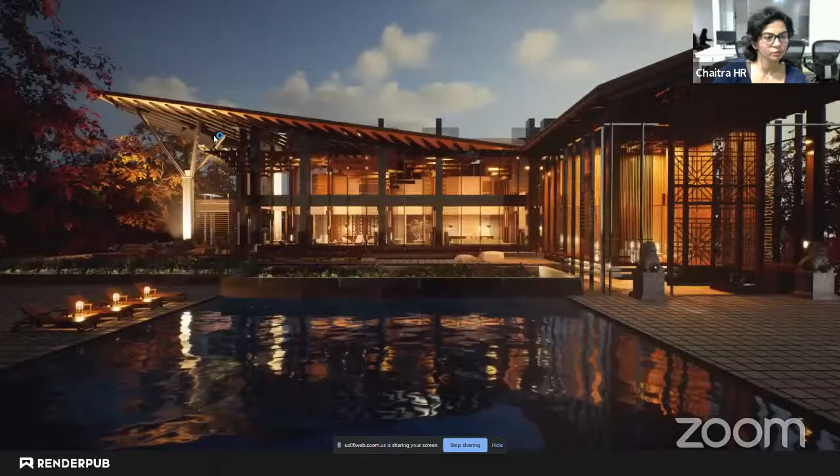This is one of the renders. It's loading, so this is a beta version. If it's a little rough around the edges, we seek forgiveness from you all. You all have to help us better the product. So active participation is highly encouraged, and we'll be very grateful for any inputs that you give us. Criticism also will help us grow. So let's just wait for it to start.

Okay, there we go. I'm going to start with a default scene. So there's a few templates here which you can start with and get a feel for the projects. So, oh okay, that was scary.

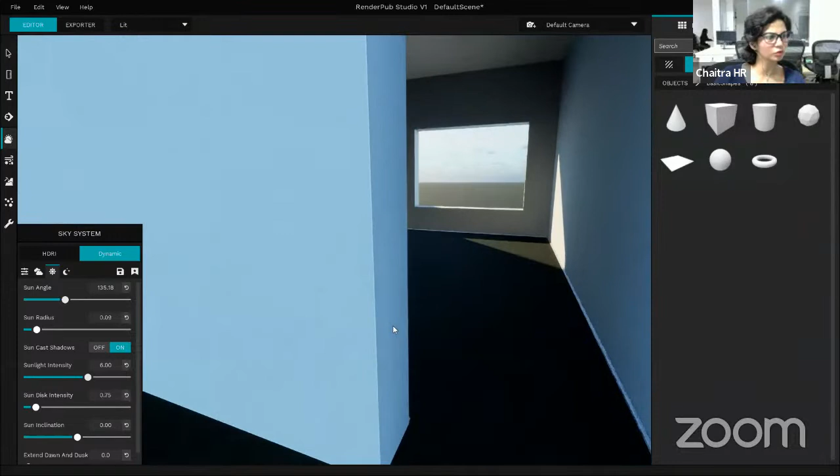And generally it's a good idea to set your model location to 0, 0, 0, because say in 3ds Max or in your SketchUp application, you have set up a lot of props within that 3D modeling application, and you export them as individual meshes. What happens then? They get scattered around. So if you go to each mesh and type in 0, 0, 0, it all rearranges itself. So that's one thing that we should do. That's good practice.

Where were we? So if you guys have any questions, you can just leave them in the chat box, and Rohan will be answering it. So I like how the sun's falling here, and I also like the intensity.

And let's play with sun inclination. So here, as you can see, you can make all of this - all of this is for aesthetics, basically. Yeah, I like how that looks.

And if you want finer control, if you want the dusky or dawn look, you can come and play with it here. This can't be an exhaustive demo because there's too many things to show you, so I'm just going to stick to setting this scene, and whatever settings come along the way is what I'll be showcasing today. Let's go to global illumination, the GI intensity, and we can set that to - yeah, I think this looks good.

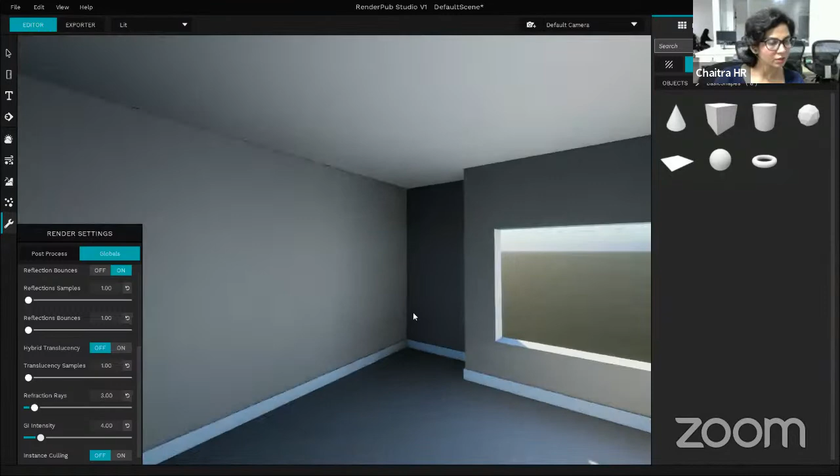Okay, so I think the lighting is all right. I can see enough to set up my scene. So let's start setting it up. First, I get a sense of the room and sort of where to place what.

So this is a nook here. This is a floor plan of an actual apartment, a living room basically. So when there's a nook like this, it's generally for the office space. I'm going to place a TV here because this might be too much glare for the TV, and I'll place my sofa here, and this wall will figure it out.

So the library has a lot of props, as you can see. Let me just open it. Tomorrow's version will have all proper props, but right now I might have issues, so I'm just going to import it. Don't worry, you have access to all of these props.

Oh, this is really small. So here's the gizmo, you sort of turn around. Okay.

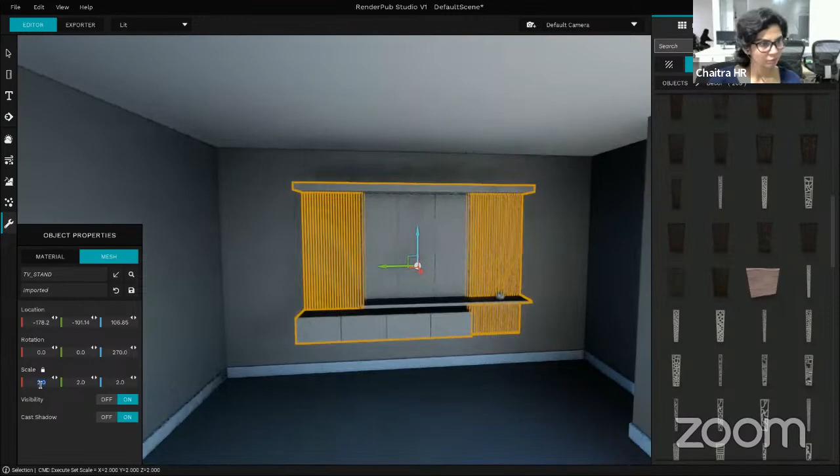Okay, this is really small, so I'm going to scale it up. This looks all right.

So this has no materials, don't worry about it. Generally, when you're placing props, we can always play around with the materials and make changes. So just look at the model, see if you like it, and just start pulling it in. Again, I'd like to make sure that the scale is right.

So desktops, right? Any tabletop is generally about 30 inches, which is like 3/4 of a meter cube. So you guys can really use more accurate measurements. This is just for a demo, so I'm just going to wing it a little bit. Yeah, that looks good.

And let's pull in a sofa. I'll go to sofas category, in objects, and all of them look too big. Since this is an apartment living room, it's smallish.

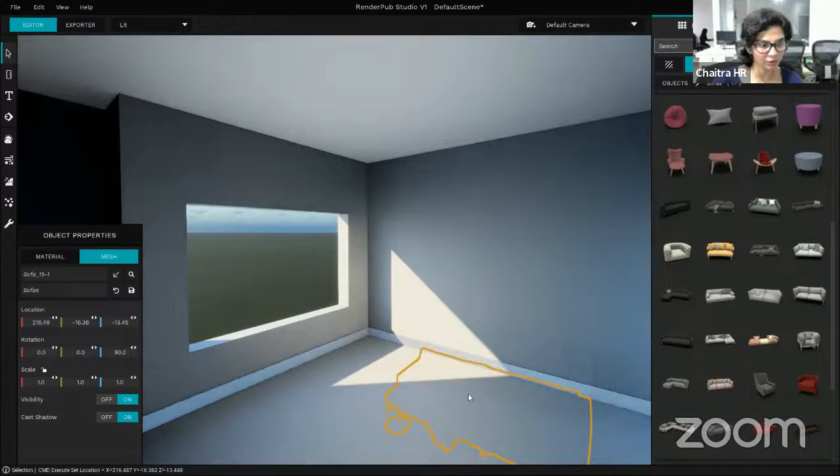So if you press G, it snaps to ground. I'll show you. Right? And I press G now, it snaps to ground. So that's a really useful tool.

I think this looks right. Yeah, I think it looks right. Yeah. Oh, okay, this looks rather small, so I'm going to scale it up. Yeah, looks all right.

Don't worry about the material, we'll come back to it.

Okay, so I don't like the material, so we can change it up. I'll show you our material library. We have plenty of materials, but of course, if you need any other material, you can use websites like Polyhaven or Quixel, and it's really an exhaustive list of materials you can find there.

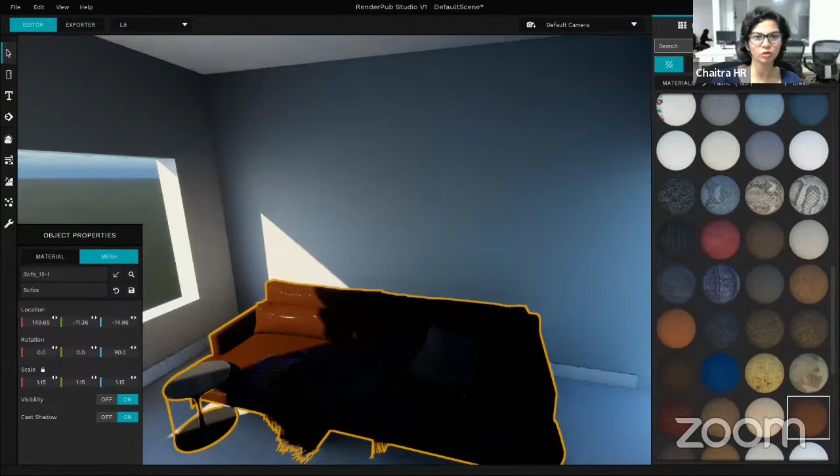So, okay, I like this, but I'm just going to show you how to create a material. For the purpose of showing you guys, I'm just going to start creating a new one. But yeah, we can get to it a little bit later.

And yeah, okay, so you have access to all of these textures also. So as you can see, albedo goes into here, and normal map goes here. Okay, let me show you here so you can see, right?

I'm just dragging and dropping them. So this is the roughness map, and you get all of these maps right there. So you don't have to generate them already.

Right, so there we go. I'll say sofa leather. Save. Preferences and show controls.

Someone's asking, right? I'm sorry, what? Go to file, preferences, and show controls. Edit, and controls. Okay, this is all that. So these are all the keyboard shortcuts, you can find them here.

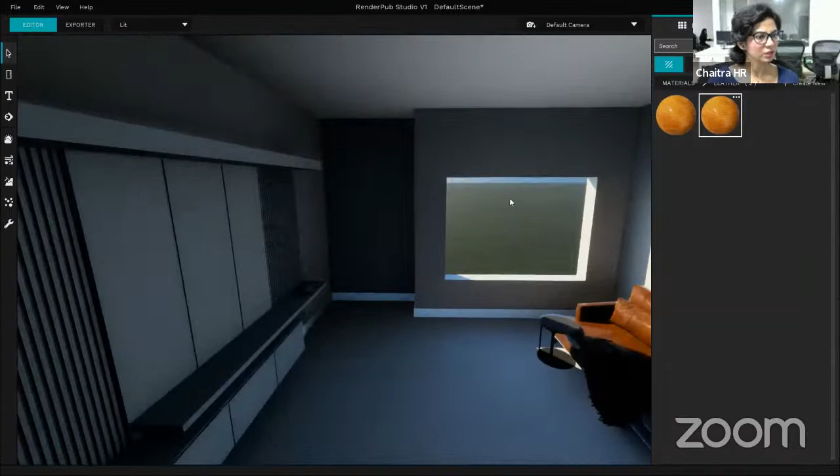I like the way it looks, but we can come back around for finer details. And the window, yeah, as you can see, it's not enough. So I'm going to pull in a light. Let me pull a rectangular light. Rectangular light, yeah, an area light for my window.

Okay, so here don't change the object. As you can see, it doesn't matter because this is a light. Let's go to light and change source width and source height here. If you can see, if I say 100, that increases, right? So make all the changes in the light part of the UI.

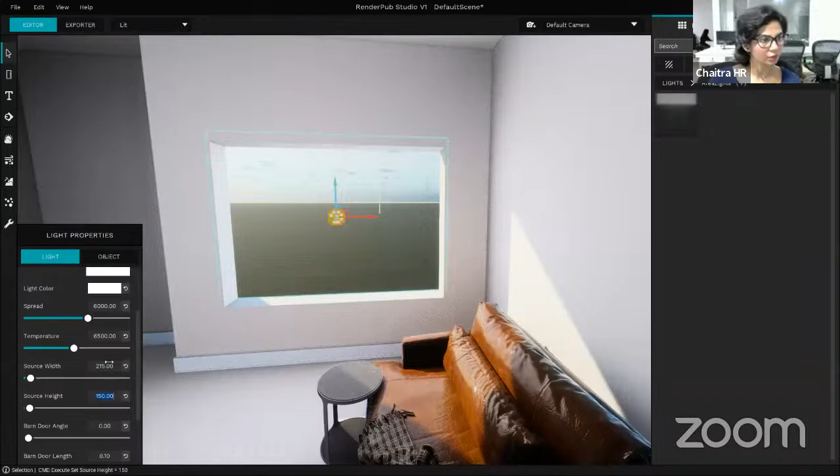Yeah, I think we've got it right. Oh, look, the room already looks so much brighter, right? Here, let's make this 0 because we want a nice spread, a 180 spread.

And the intensity seems too much, or too little, let's figure it out. And if you can see here, the temperature, right? So it can range from 4,000, it can be anything really, but I'm making it 6,500. So for a warmer lighting, it's about 4,000, and for a natural daylight setting, it is 6,500, which is, yeah, it's all in Kelvin.

I'm going for a 6,500 temperature, so it's a nice daylight color. And the intensity, let me try. 10 is good. So generally the intensity range would be 8 to 12 for a smallish room. Don't go beyond that, again, it's going to look overexposed, which is not a nice look at all. And definitely don't go beyond 20 for anything. Yeah, I think the room is well lit up.

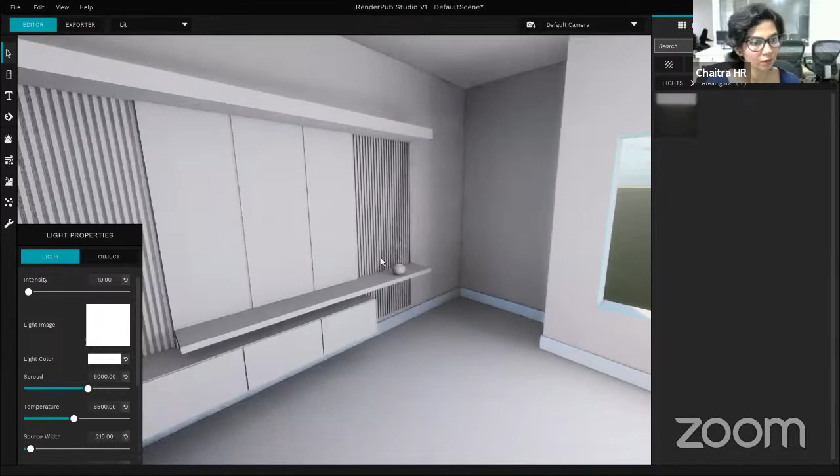Let's start texturing our walls a little bit. Our walls, I'm going to go very simple, just plaster. Oh, it's too gray, but never mind. We can always go back and change it.

So the way this thing is modeled, there's a lot of patches, so excuse me while I go on texturing all of these things. But more often than not, this is what you guys will have, so it's a realistic demo, I suppose.

This is too gray for my liking. I was actually, let me pull it up. So there's a reference image for you all. So this is what I'm going for, a sort of this look, not exactly this, but it's always best to work with reference images. So you don't have to think about every little detail and every little element that you're going to put in the scene. And okay, so it looks gray.

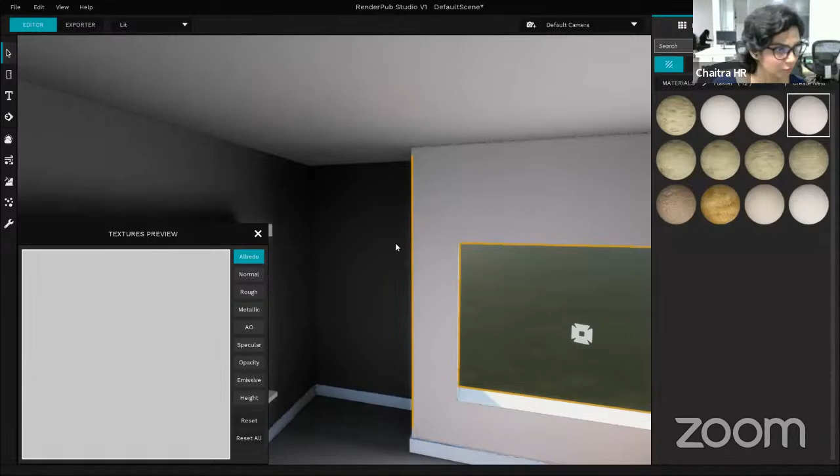So I'm going to reset this all, because as you can see, some things here are grayish. So I'm going to reset albedo for all of these things.

So albedo basically means the picture. Here, if you see, I'm just going to show you all. See, this is the albedo, what it looks like. So the normal is all the bumps, and roughness is what roughness is. And specularity and metallic and all of these things you can play around with.

So I'm just going to start resetting albedo so it looks white. Ah, much better, it's looking white already. As you can see, there was a grayish tint, right? So we've removed that, yeah, I like it.

So let's do the floor now. Floor, I'm going to go for wood. So you guys can't see my reference image because I pulled it off the screen, but you have it in the drive link that we sent you. So you can just open it up for reference if you want.

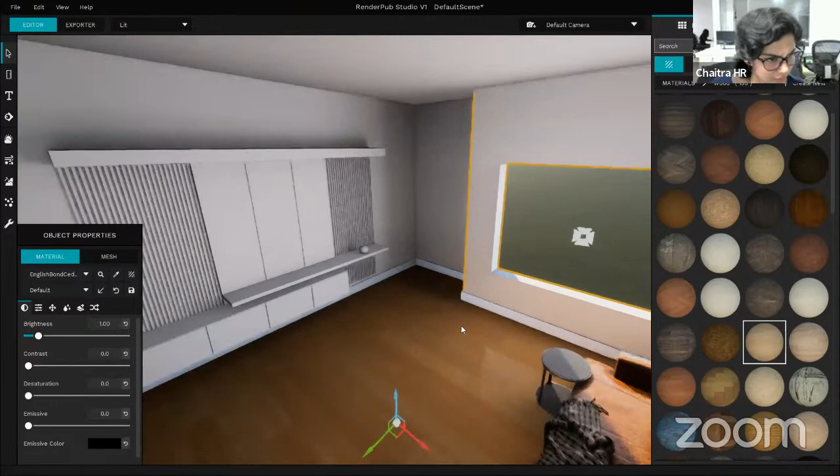Generally, okay, so you see the patterns are like this, the floorboard pattern. So I'd like to rotate it 90 degrees. Much better. This looks too big for me, so I'm going to scale it. Oh, yeah, it looks good.

I don't quite like the color, it is too yellow for me. I'm going to change that up a little bit. So I have a hex code here that I got off the internet. So you can look up wood colors and things like that, and you get hex codes. That would be a very good starting point for you, otherwise you'll have to do a lot of tinkering, it wastes a lot of time. So just do this.

See, there we go. Oh, yeah, too bright. Ah, see, like it. And let's see how it's reflecting, right? Okay, you see it's too shiny. Floors are generally not like that.

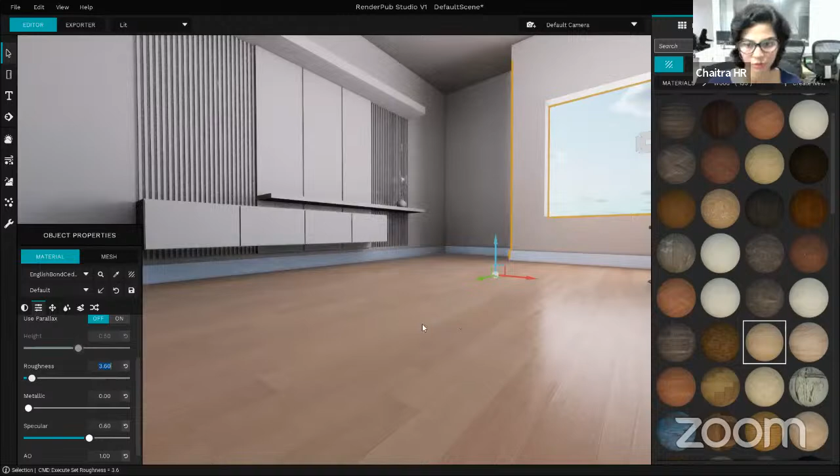Get a close-up reference image and start working towards it. So I am going to change the specularity to 0.6, that's a good starting point, and start playing with the roughness, okay? We're in the vicinity now. This looks good. This looks good, okay, it's shaping up already.

Now let's apply some textures here. Again, I'm going to go with wood for this TV unit. Let's look around.

Let's see. Yeah, no, it's too brown. You see the wood here? I want this to look somewhat similar, right? Because otherwise the aesthetics won't look good.

Again, like I told you, a good starting point would be to get some hex code off of the internet, depending on what wood color you want, and then play around so you have very little tweaking to do. So again, I'm going to desaturate it. Basically the same things. Once you know it, you know it.

You have to play with the brightness. Yeah, that looks good. And for reflection, always place yourself in a way where some light is bouncing off of it and you have a better gauge at what the value should be.

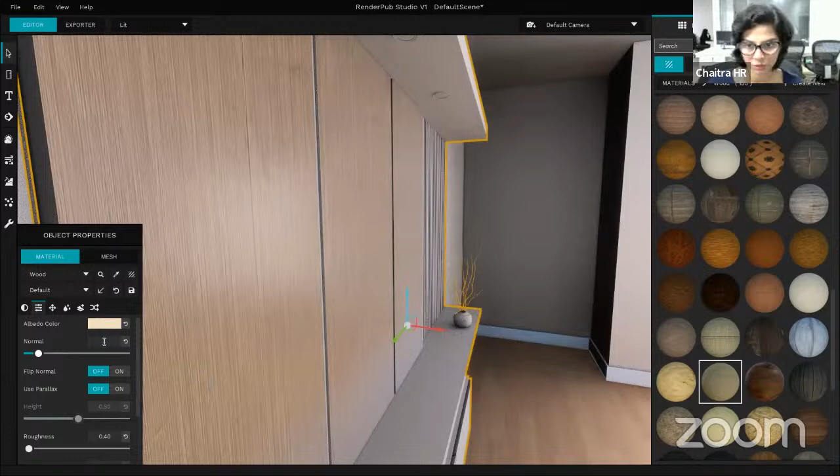I feel like it should have more bumps. So let's play with normals. That's what will give you that realistic dents and bumps and all of those things. So let's start with not too much. Yeah, let's go, I think so. It looks good, and the rest of these things.

Yeah, I think this would go well with the aesthetics. Again, too brown for my liking. So how I'm choosing all of these materials is I'm looking at the patterns here, right? So as long as I like this pattern, I'm going to pull it in, and then the visuals of it, I can tweak it. The material, I can always tweak it. So the pattern is what I'm looking at here to make a choice.

See, it looks too yellow, but I like the pattern. So let me go here. The same thing what we've been doing for everything, I'll start off with the wood color. Desaturated, so some of the color goes off.

It's too yellow. The warm undertones or the cool undertones, when you don't want too much of it, you desaturate it. I'm just using the same values as I did for the other wood materials. I'm just going to play with the brightness to see if that's what I like. Always keep a close eye on your reference image, so you know how it ends up looking.

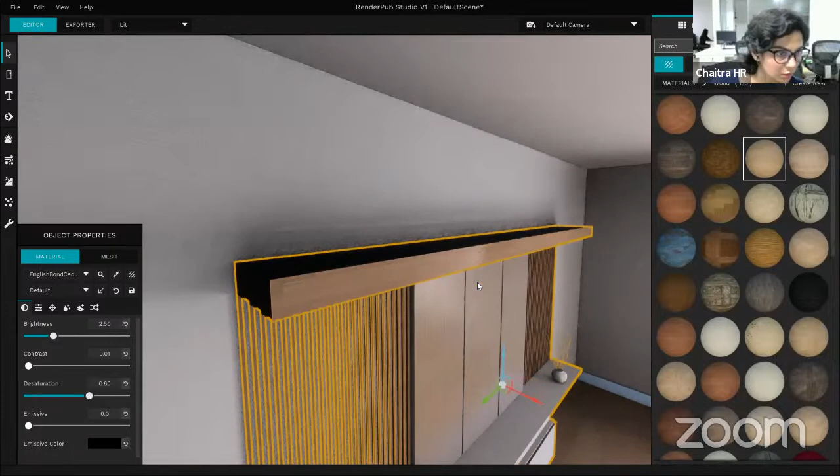See, there we go, it's too specular. When it's too shiny, so I'm going to change it a little bit more. I think that's all right.

Yeah, that looks good. And this I'm just going to leave it white, but you know, all of those sheets, right? They look a little shinier than this, the ones that they paste on plywoods. So I'm going to leave this white, but I'm going to make a few changes to it to make it look more realistic. Also, nothing in the world is ever pure white or pure black, so you have to give it some sort of tint to make it look realistic. Otherwise, it's too harsh on the eyes, and it just ends up looking very fake.

And roughness, we want to make this shinier, right? So we want more light reflecting off of it. So I'm going to place myself at a nice angle.

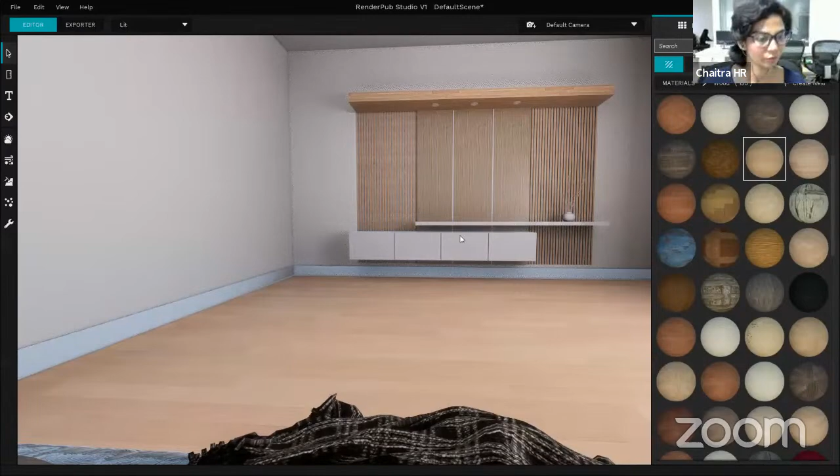Okay, see, generally when you have TV units like this, they have cove lighting underneath, so we can do that. Let's pull in area lights.

It's not that. So what changed? Yeah, 220. Again, no point in changing the scale of the object when it's a light. Go to light, and then this is where you want to play around. So this is a thin strip, right? So I'm just going to keep the height very thin, and let's see.

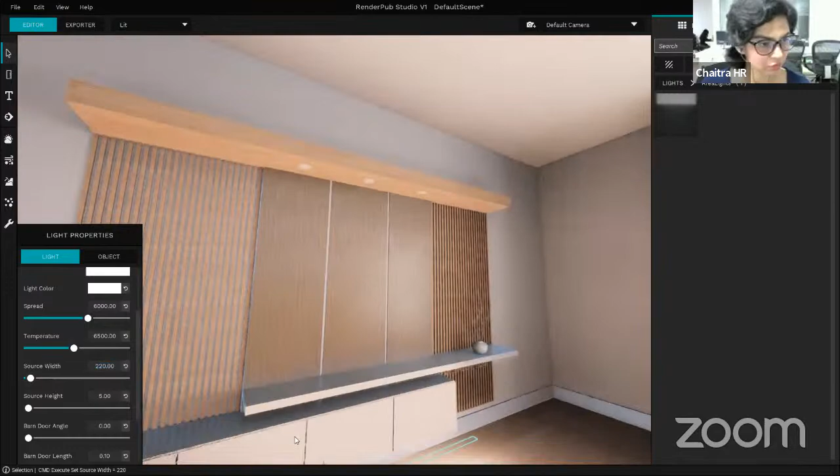Be a little bit bigger. We need it to be a little bigger, so I went ahead and changed the source width and placed it properly.

Okay, so as you can see, the light seems too harsh, too white, because interior lightings are generally warmer and it gives a very nice aesthetic. So I am going to change the temperature to about 4000 Kelvin. Look, there's a nice warm white.

And the intensity seems too much. I'm going to reduce it, yeah, I like it. Once again, it's all to do with aesthetics. The tool is really simple to use. It's about what aesthetic you're going for, and setting the light to that aesthetic.

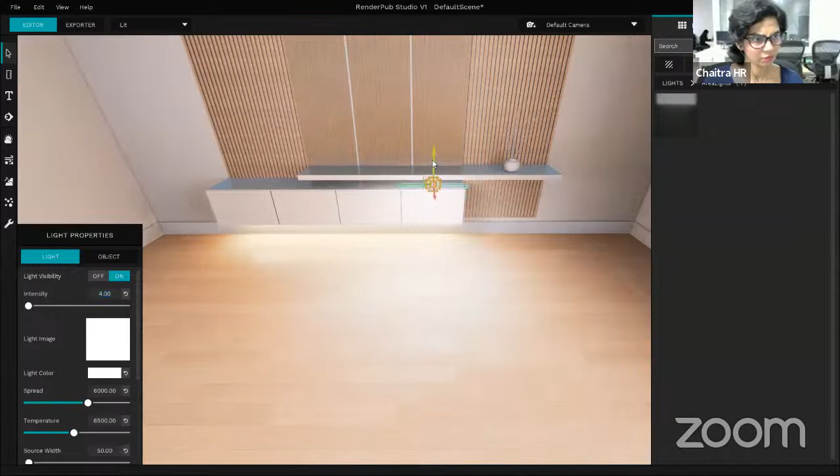And I can just copy, I can hold Alt and pull it in. Change the source height to again 5, because we want this to be a very thin strip. It's underneath this, let's see. Going to change the intensity, much better. And source width, going to just...

Maybe 180, I suppose. Yeah, that seems right.

Again, I want to change the color to a nice warm interior lighting. Shade all the way back. Okay, I'm going to reduce the intensity a little bit further. I think 2 is enough, that was also a little too harsh. And 1 for the top.

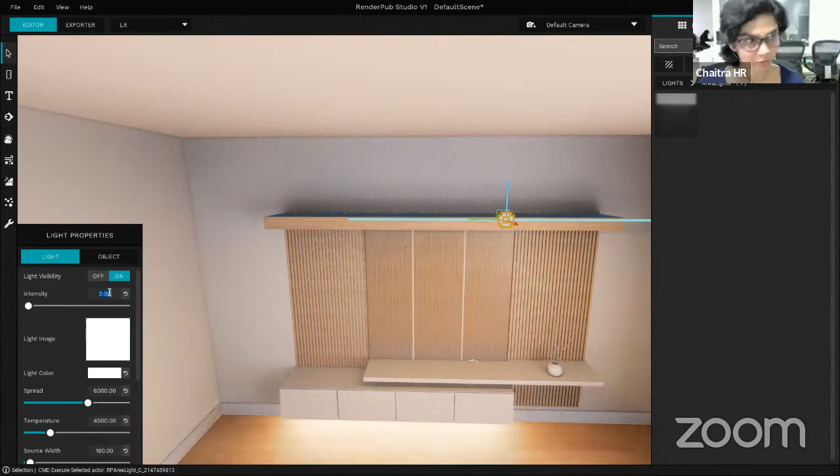So I just held Alt and pulled it up, so that will duplicate it. For this, I might need the intensity to be a little bit higher. I'm going to flip it so it's facing upwards.

Yeah, there you go, I made a little mistake, I was trying to scale in object. Barn door length, always keep it at 0 so you get a nice result.

I think it's looking good already. So let's pull in, I think that's enough for this. And yeah, let's move on to sofa.

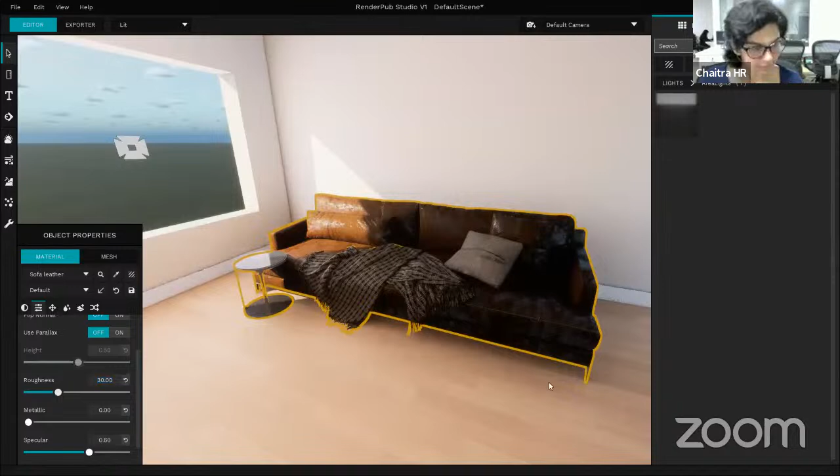And the legs, right? So okay, look at that, it doesn't look metallic at all. So I am going to go here, crank up the metallic. Okay, it's still not reflective, so I need to reduce the roughness. So let's go from 0.1.

Okay, that looks all right. And okay, it's not shiny enough for me, so I'm going to reduce it a little bit further. Okay, that's all right, that's enough. And yeah, I think this is starting to look good.

So let's go over to this wall. Nothing's happening here, it's feeling a little left out. Let's add some nice paneling here, that should look good. So going back to wood, that's in our material library.

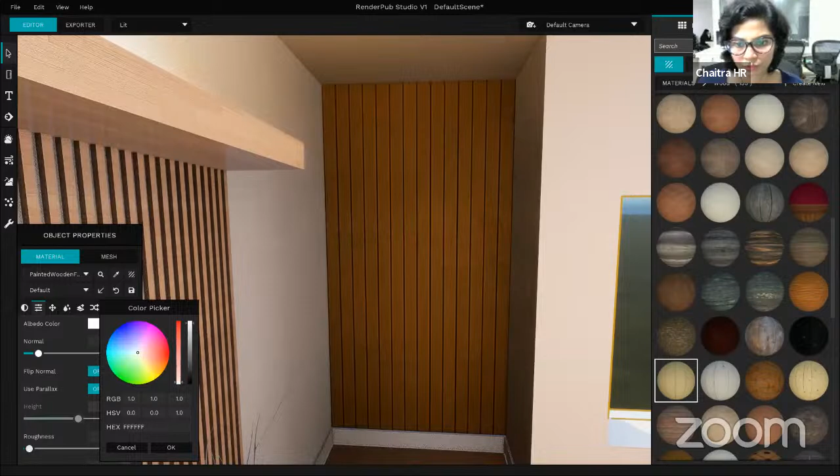Again, desaturated, 0.6, I think was our value. Increase the brightness to... okay, take a look, okay, this looks good already.

So there needs to be a desk there. I keep calling it desk nook, but there's no desk. So I'm just going to pull in a basic cube like this and create a desk out of it.

This needs to go down, down a little bit more. Okay, I think 0.02 is good. Yeah, so it's a meter cube. And I'm just molding it as needed here. Yeah, I think that is okay.

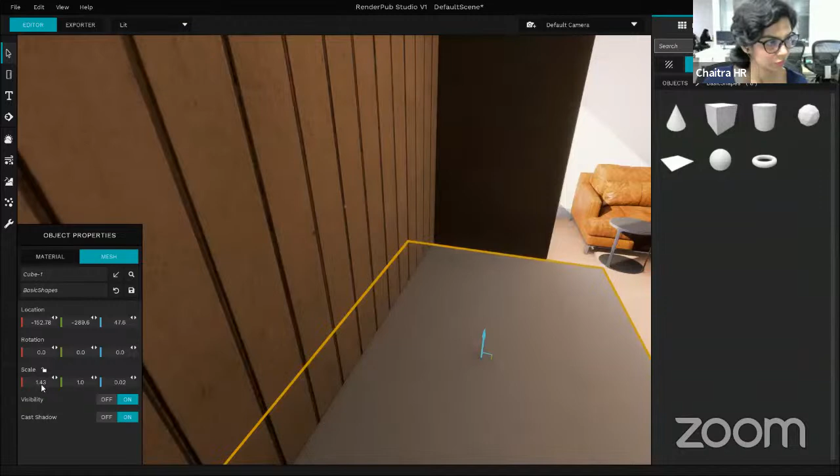Let's reduce the... oh sorry, I changed the wrong one. Section. Yeah, there we go, and I'd like to add a panel up here.

So I'm just going to hit Alt and drag, hit Alt. Okay, one minute. Yeah, there we go.

290 should do it. No, a little bit more. 291. Okay, now that we have a panel over there, let's add material. We're going to go back to the same wood, so it all looks put together.

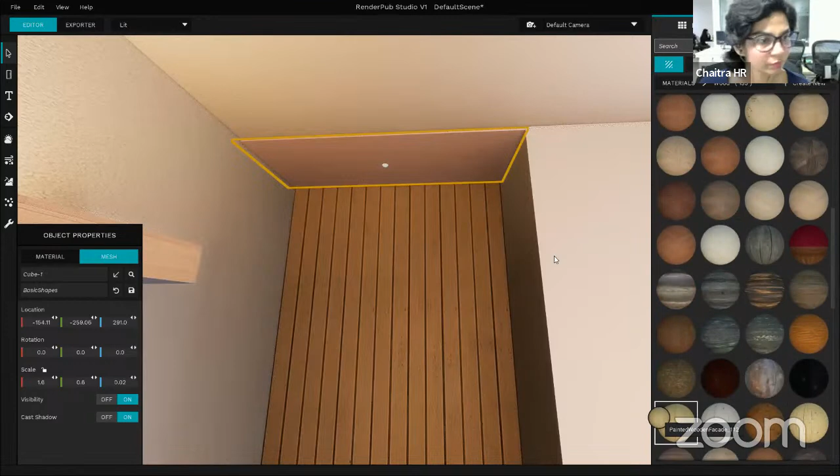Same things. Change the wood color, desaturated, to remove the yellowness of it, and increase the brightness to... since we've done this before, I'm just going to keep it at 2.5. If it looks bad later, we can always come back and change it. Okay, there we go, it looks better already.

Let's change the specularity, and specularity it's always best to start with 0.6. And the roughness looks about all right for now, so let's just leave it at that.

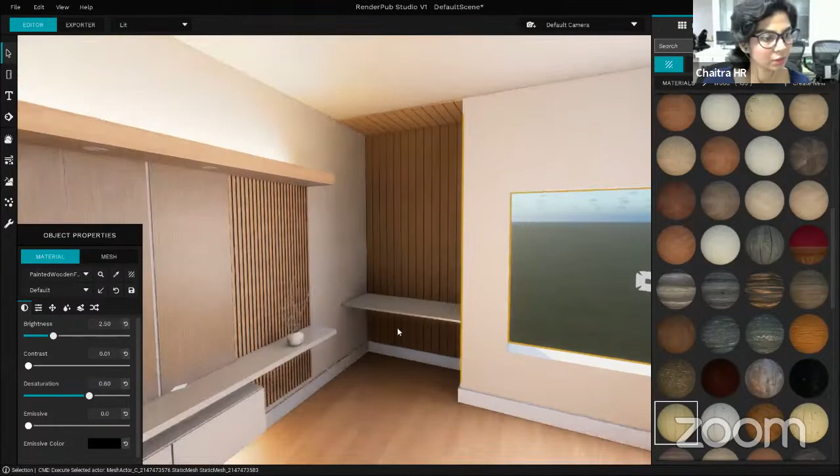I think it's a little too shiny, I see a little bit of shine here. So I'm going to change roughness to a little bit more, 2, 3, 6. Yeah, I'm just going to do the same thing over here, copy the same values basically. Oh, this isn't okay, I'll just put this same wood over here. I think it was this one.

There were duplicates because I pressed Alt too many times, and that's why it didn't apply the material. So I'm just deleting a few of them and going back and applying it. Oh, there's one more. There we go, finally.

Okay, so let's just look at the values here. I think it's pretty much the same for this also.

Keep checking the chat, someone wants to see switching off lighting indicators. Sorry guys, I haven't been keeping a tab on the chats because I'm all engrossed in working. But yeah, Rohan's telling me something needs to be done.

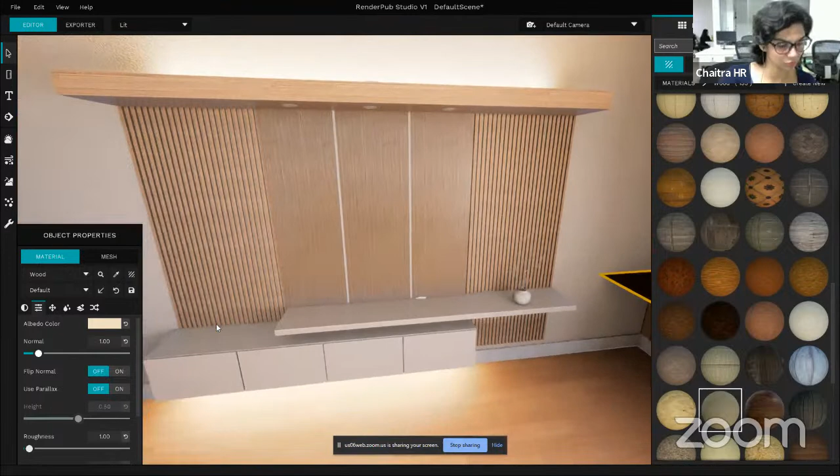What is it, view helper geometry lighting off? Sorry, I didn't catch it. Turning off the lights, right? Yeah, just click on the lights. Okay, you want me to switch off the helper geometry? Yeah, that's bright, needs to be turned off, is it? Yeah, okay, view. Reflex, light helpers, yeah, there you go.

I think it's a little overexposed. We'll come back to it later. First, let's set up the scene and then do the finer details later. So I'm going to keep the sprites on for now because I might have to come back and work with them. But feel free to ask me to do stuff so I can show you how it works.

Can we hide the lighting object in the window, or does it? Okay, it goes away, I think that's what we were addressing now. Rohan, just ask me to stop, and if there's anything, I can't keep tab on chats.

Cool, now I think we are done with this desk nook. Let's look around. Okay, this is already shaping up very well. All right, there's an empty wall here and we've got to pretty it up.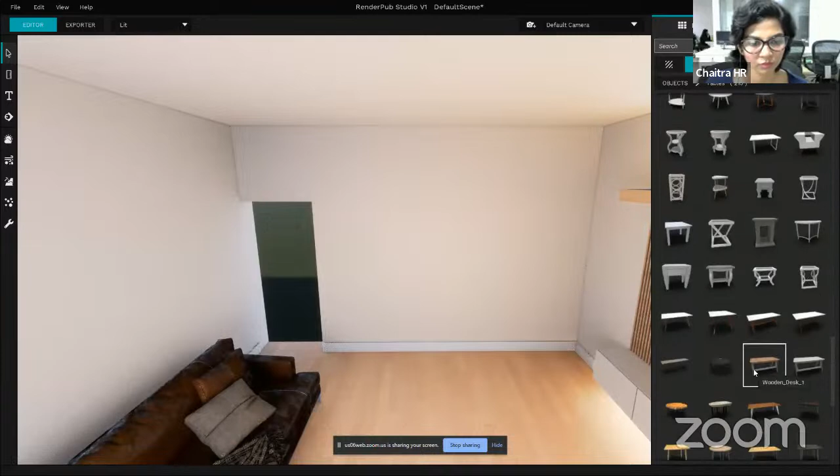I think I'm going for basic looks here, so I'm just going to add a console table, go to the tables category, and there's quite a few here. I'm just going to pick a very simple one, I don't want to do anything fancy here. Yeah, this already sort of matches the aesthetic. Ooh, that's quite big.

I think it's a little too wide, so I'm going to scale it. If you press this lock, it scales equally on all axes, but I don't want to, the other dimensions look all right to me. I just want to decrease the X so it's a little slimmer because it's a console table. This can be used as a dining table or whatever. Okay, just this looks empty, so maybe I'll put in a chair and a plant or something over there.

Let's just place this for now. I think this looks all right, but I don't quite like the wood here. I'm going to change the material, go back to wood, and I'll choose something without, there should be grains, but not a lot of patterns. Yeah, I think this does not have, that's too dark.

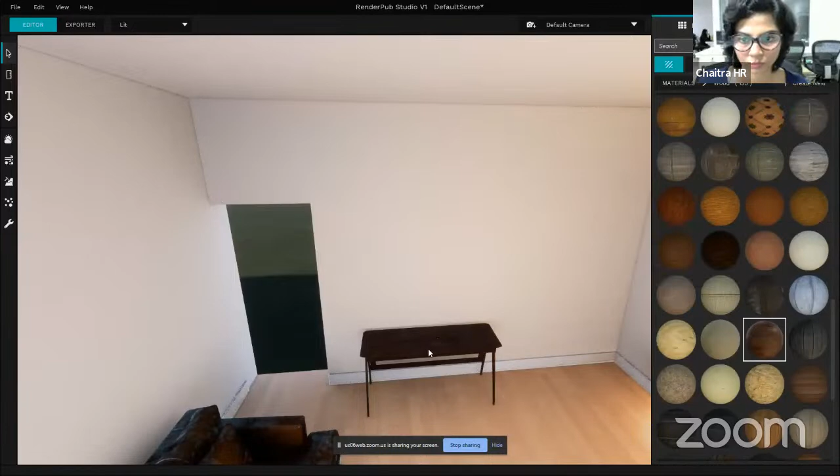Don't worry, we will change the brightness, maybe. See, it looks much better. Sometimes just pull back and see how it's all tying in together. That really helps, just to go back and see what it looks like.

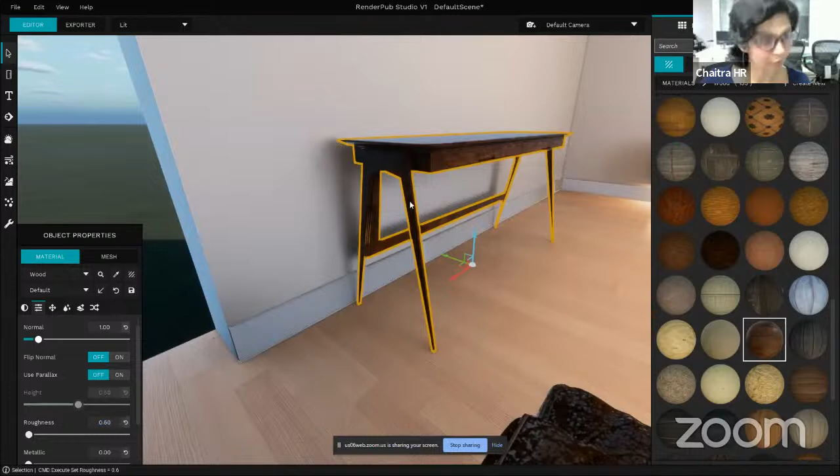Angle yourself properly so you can see light bouncing off of it. And I think it's a little too rough, so I'm going to make it a little shinier. Yeah, like polished wood, yeah, I think I like that. Just leave that be.

So this still looks empty here, right? So I'm going to pull in a chair. Just an assortment of chairs here, I'm just going to pick something in the first row. Or even this is too dark for me. Don't worry though, we'll change the material.

Okay, so there's several websites where you can download nice patterns from. So I'm just going to make this chair a nice, fabricy patterned chair. So I'll show you how to do that. This looks quite nice as it is, but just to show you guys, I'm going to do that.

Materials, fabric, just put any fabric here, right? Yeah, don't worry, let's go to, it looks too dark, but we're not going to keep this. Albedo is this blue denim sort of a thing, and I'm going to pull in some pattern here.

I've just downloaded some patterns, so I'll just show it to you.

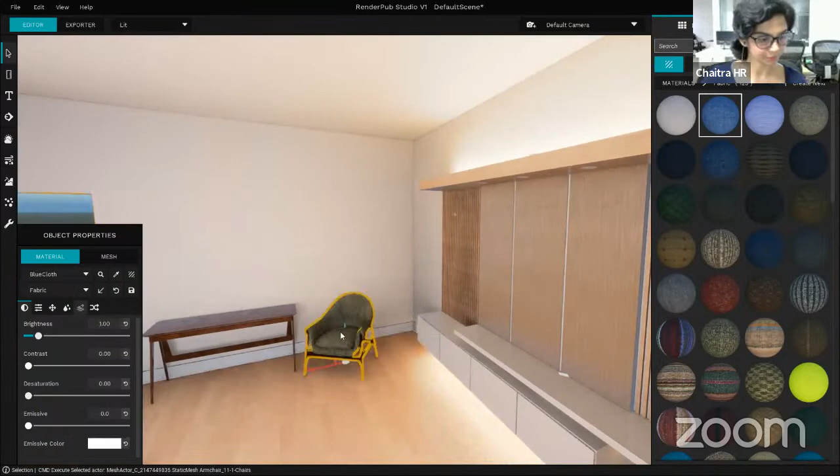So this wall still looks empty, right? We've got to put a portrait or something. So let's go to decor.

Let's pull in some portrait over here. Oh, it's facing the other way. So if it looks transparent, it just means there's no normals there, so that's why you can't see it. So you just go around it and click. See, now it looks proper.

Let's place it on the wall first and then pull it back up.

So if the image goes off, that means I've pushed it too far into the wall. Yeah, there we go. So I'm going to position myself here so I can see straight and see where I'm placing it. Okay, I like the frame and everything, but I don't really like the image.

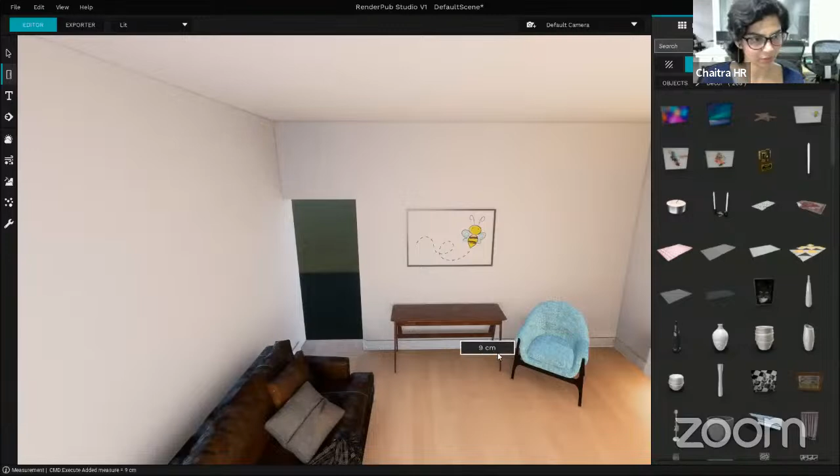So the section cube and all of those things show your clients the light play and all of those things, but I don't know how much time I have left. We started the meeting also quite late, so I'm just trying to rush along.

So here the glass isn't really reflecting at all. That won't do, we'll go and change the glass over here. So you see, it's the default material. So if you click on glass, that will be our master material, glass.

And then opacity, I'm going to reduce it. So if the opacity is at 1, it sort of looks like chrome, so maybe you'd use that for mirror and things like that. And I've reduced the opacity, I like this. And now I am going to reduce the roughness also.

So it starts reflecting more light. I think it's reflecting too much. Yeah, I think that's enough.

And I want to change the... over here. So I go to materials and I select this. And once again, it's just... oh, I think I must have closed it. Let me just open that folder again. How did it close? Okay.

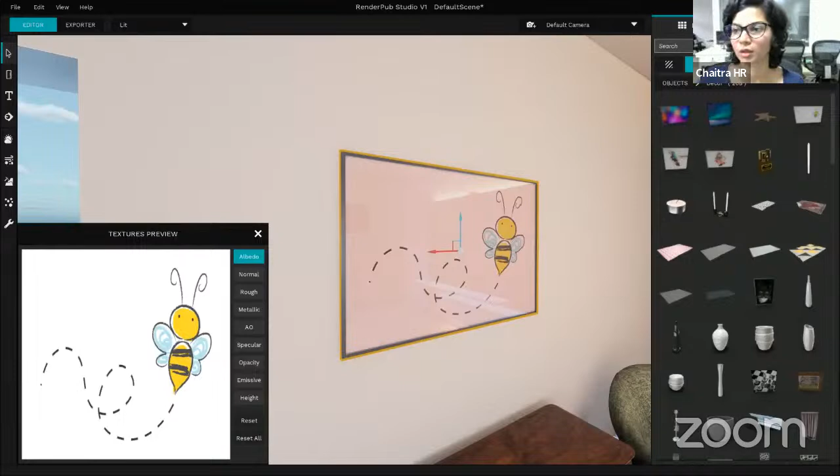Sorry guys, I lost the path there. Okay, I'll show you. So it's just a matter of dragging and dropping it here. See, there we go, it changed already.

I think it's a little too pinkish, so I am going to... yeah, I think I like this better. We can move on, I think.

So I'm going to place a few stuff on the table here, on the console table. Maybe a flower pot or something.

Just browsing through the library. Yeah, let me place this. Looks a little too big, so I'm in material... I'm going to mesh because I don't want to scale the material, just the mesh.

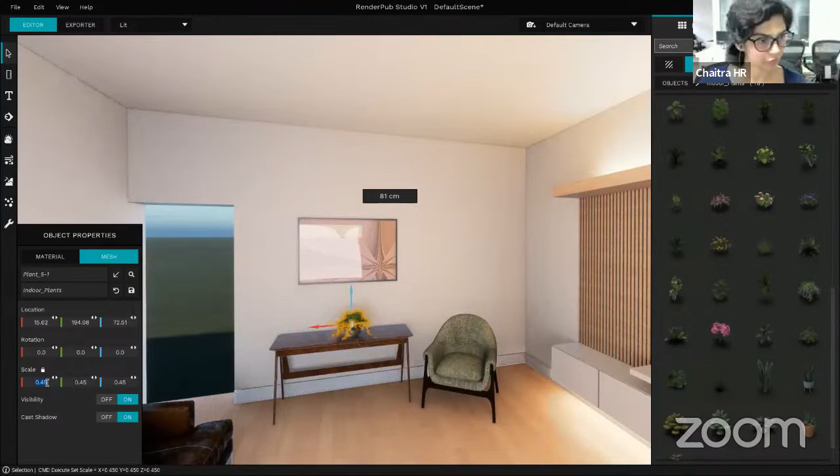Yeah, I think that looks all right. And I'm going to objects, indoor plants, and I'll probably bring in some. This looks nice, too big. So I'm going to lock the scaling here because I want it to scale down uniformly. Place it on top of it.

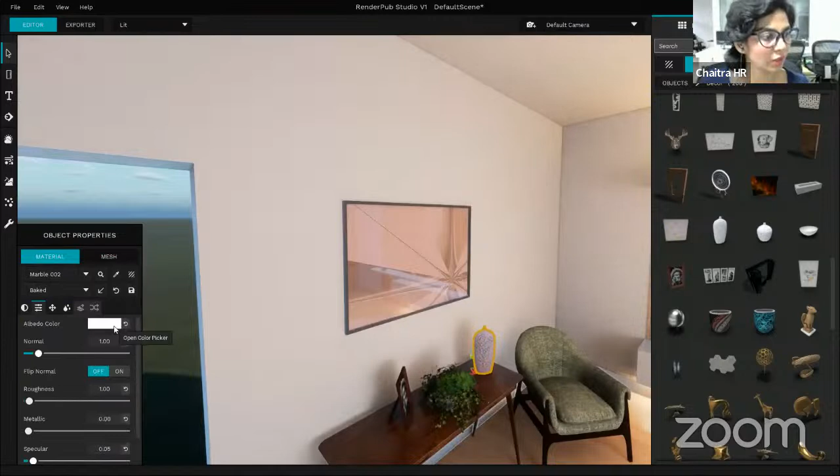Back. Go to material, go to albedo. So it's white, right? So I'm just going to pull this down and make it look charcoal black, I think. Yeah, that's good. If I want, I'll just go on and place this. No, I think that's too much. We'll just leave it be.

Maybe add a plant here. Again, all our pots are in decor. Let me see what I like. Yeah, this is all right, but it's small, so we need to scale it up. Scale it up uniformly. Yeah, I think that's good. Again, I'm going to pull in some sort of a bamboo. Let me see how it looks. Yeah, not bad. I'm just going to leave it there.

Does it look like it's in the pot? Looks like it's in the pot. Cool, I think we're done with this wall.

We can move over to this desk nook and show it some love. Let me go to lamps, right? This looks a little shady, so I'm just going to add lamps here.

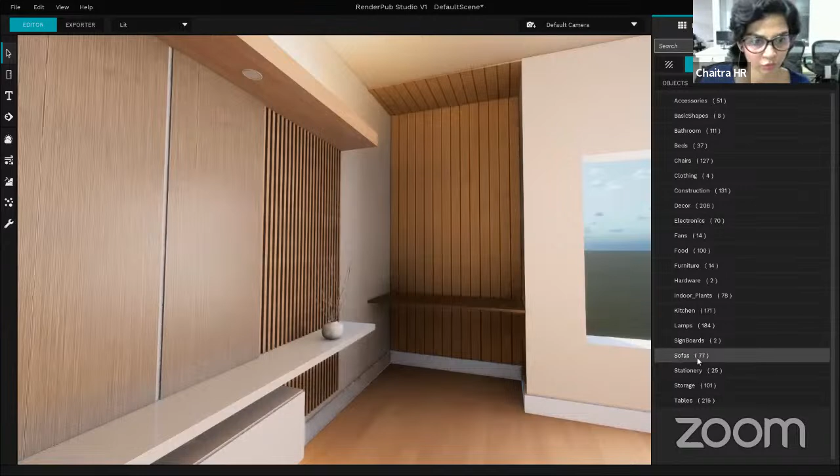Pull in a ceiling light. Whoa, that's really big, scale it down uniformly. So make sure if you want to scale it down uniformly, you're pressing on the lock here. Otherwise, it'll do whatever it wants to.

I think that's enough. Let me go make sure. Okay, it's right on the ceiling. Let me position myself so it's easier to do it. Just copying and pasting another one. Yeah, I think that looks good.

So let's pull in spotlights, right? So these are all spotlights. I'm going to spotlights, pick anyone that you like. I'm just going to pick this one. It's spreading too much, first of all I can't see the light, so I'm just going to increase the intensity by a little bit. How does 10 look? Yeah, 10 looks good.

And it's spreading too much, so I'm going to change the inner cone angle and maybe, yeah, I think this looks good. I'm going to keep it at 30, and the outer cone angle also - just move around, see what you like. Yeah, I think 60 looks good.

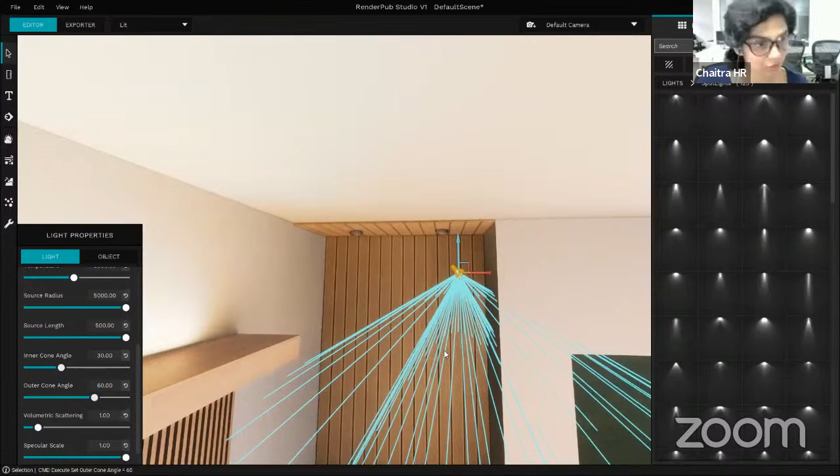And source radius, to reduce it a little bit. Let's see if we can see the spotlight. Yeah, I think we can see it. I'm only going to do this for one, so I can just copy the other one and move it. I think I need to push it closer to the panel, right, so I can see that nice glow on the panel. I like it, yeah, that's enough. If you want, I could just reduce the intensity a little bit. Let me see, yeah, I like it. Oops. Yeah, there we go. Oh, it looks nice now.

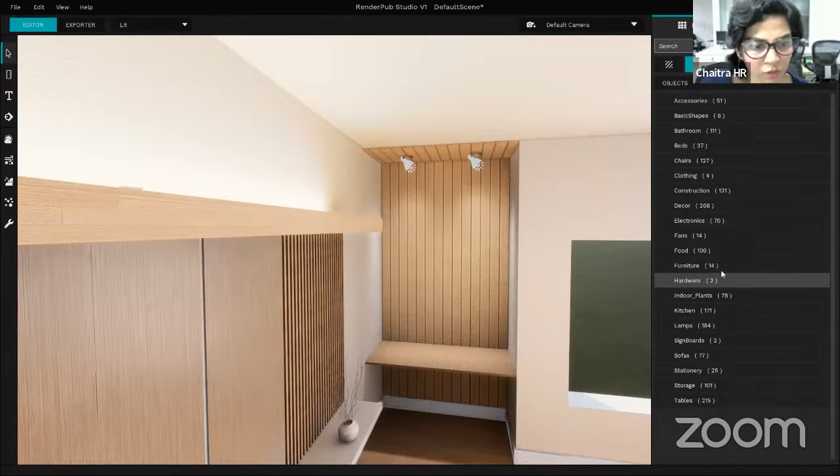And let's pull in some objects here, it looks quite empty. Let me go to objects, decor, no, electronics. So maybe I'll put, since it's an office nook, let me put a monitor or something there. Oh, it's a TV, never mind - it'll be our makeshift monitor, I won't tell if you don't. So reduce it, that seems about right, a little bit smaller maybe.

Oops. Yeah, I think I'm okay with placing it there. Let's place some more stuff here, going to decor. Like this, it's too big. As you can see, most of the things that I'm doing here are just design related, right, because the tool's giving me no trouble. Maybe a little bit bigger. It's not sat on the desk. Okay.

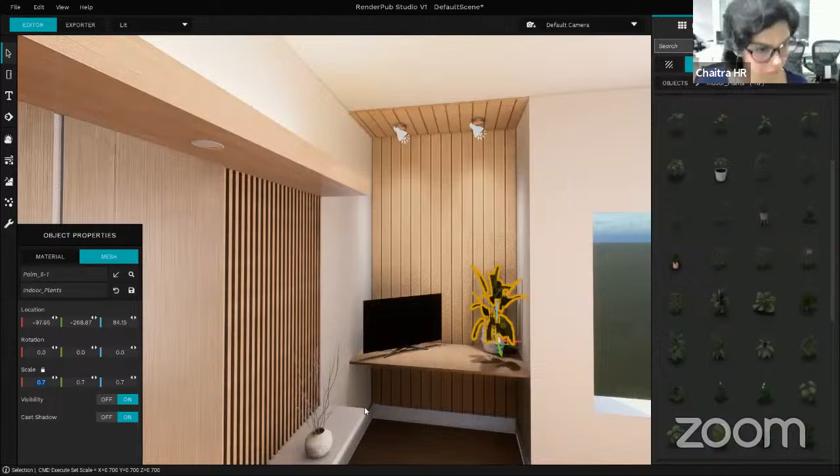Okay, G was nothing, G was nothing. I'm going to pull in a plant or something. Yeah, I suppose this will do. Oh, this is also not scaled properly, I will reduce the scaling, uniform scaling, go down. Yeah, I think this is about right, I don't want to keep it at odd numbers. So, oh, the leaves are going through the wall, so I'm just going to pull them both out a little bit. Yeah, I think I'm happy with that.

Let's place a few books, and pretend whoever lives here loves reading. Objects, I think they're in stationery, so just click, drag and drop, drag and drop. Let's make them seem like real intellectuals, put a lot of books. Okay, that's quite enough, this is just a demo, I shouldn't get carried away.

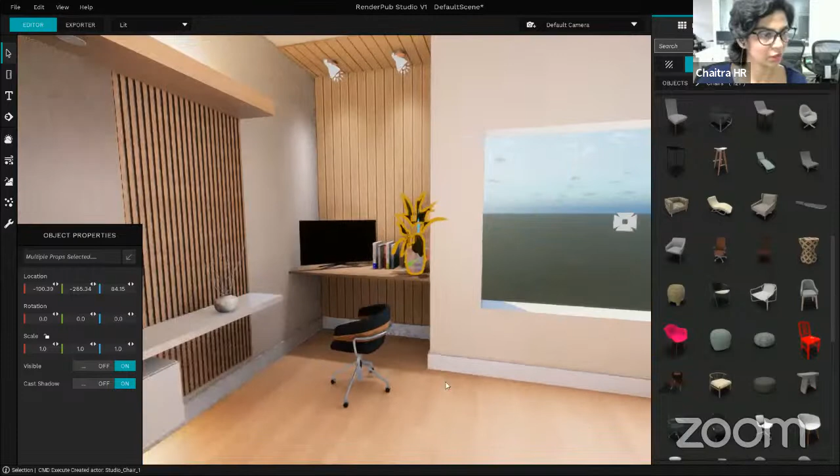Okay, this is done, we need a chair here, something to sit on while you work. Again, browse through the categories, you do what you want to, right? I'm just going to, wait, oh, it's a very small chair. I am going to scale it up, uniform scaling. That looks about all right.

I do. Snap. G, so I press G and it snapped to the ground here. I'm just going to push it a little bit further, yeah, I think that's enough. Oh no, it still looks a little empty, let's just pull in something. Let's go to decor and pull in - this looks nice.

I hope it's snapped to the wall. Let's go closer and take a look. No, it's not—it'll leave a weird shadow if you don't snap it properly. Yeah, I think there we go. Let's center it. That's enough, I think.

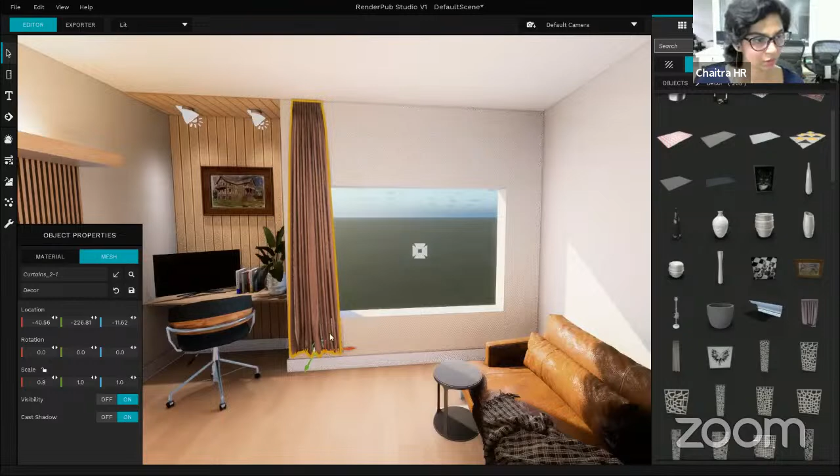Yeah, I like that. So Alt, click, pull, right? That's easy to duplicate.

And I don't like this fabric, it looks a little too thick. So I'm just going to check what the material is—it's a baked texture, so I'm going to make it fabric. Escape. Oh, it already looks so much better, right?

And let's fix this, because when you see curtains and there's light passing through, it sort of has a glow, which is called subsurface. We'll get to it—I'll show you how to do it.

So this is a little too dark, I'm going to adjust it. The first color is what lets light through—see, it lets that light in over here. This part has a nice glow, whereas this one stuck against the wall doesn't. So I'm just going to keep it even lighter.

Okay, and the subsurface amount—I can move it around, and I'm just going to keep it at this value. Yeah, I like it, I like how this looks. So I'm just going to do the same thing over here.

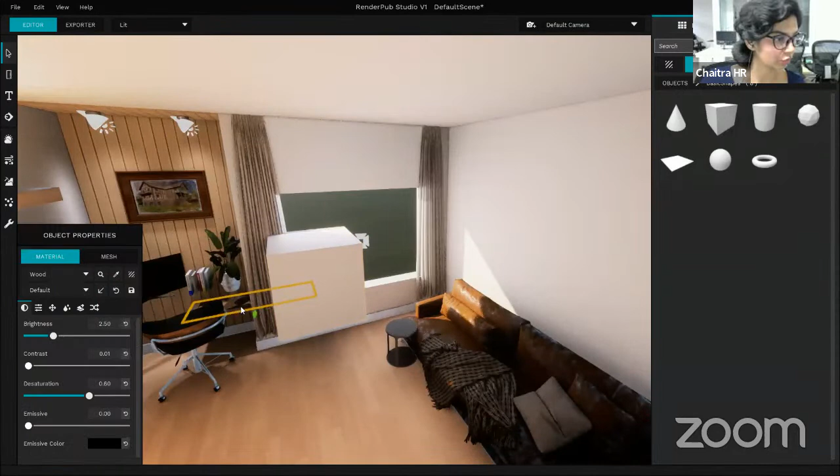I think I moved the table. What did I do? Let's bring this back—inadvertently, I moved it. I think that looks good.

Yeah, that looks good, right? Okay, so let's scale it to make that sort of panel that they use to cover up all the ugly curtain rods and things like that. I'm not pressing the lock, as you can see, because I don't want uniform scaling—I want to reduce the Z, yeah, this looks about right. That's enough for us, because I just want it to be sort of a plate that covers it up.

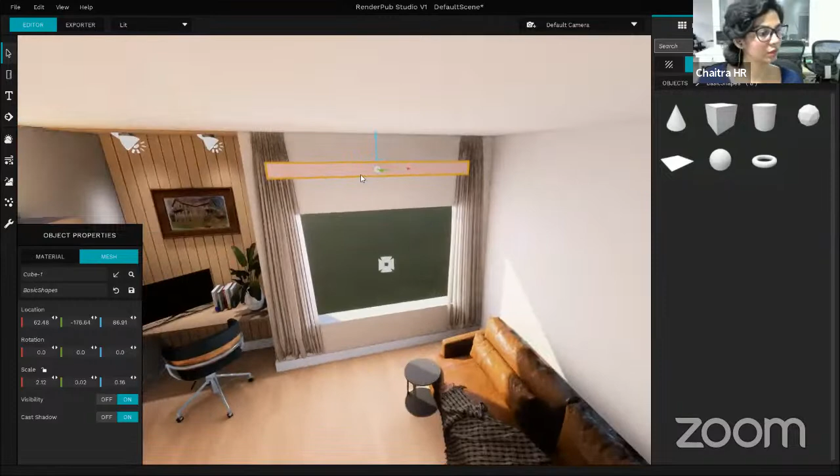Enough? No, I think we need to make it a little bit bigger, right? Not enough. A little bit bigger—oops, too big. Let's keep it at 3. If that's enough, let's go over here. Is that enough? Oh, just a little bit more. I think that's good enough.

And maybe a small rectangular cube. Alt and drag, that will duplicate it. So let's rotate it. Too big, right? Scale it first.

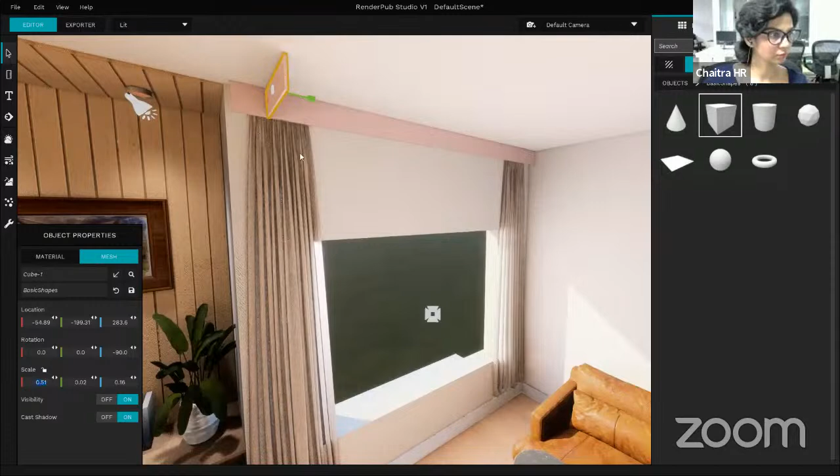That looks right. Place it at the edge. Go back around, pull it to the wall. Reduce the X a little bit more. Okay, I think that looks all right.

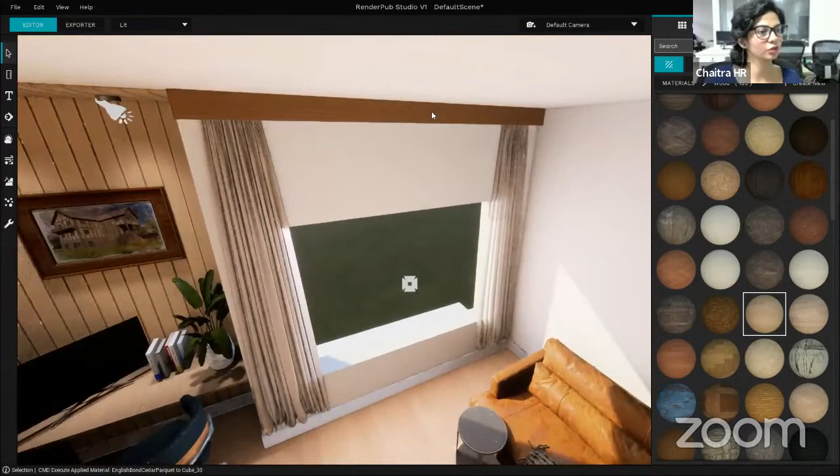Let's apply the same wood material. Let's not worry too much about it—you guys know your aesthetics, so I'm not going to bother you with it. I'm not going to bother making things too perfect. We know what to do with this wood, right? Change the albedo material, desaturate it so it doesn't look as yellow. Increase the brightness so it matches the aesthetics of the other wood. Okay, this looks all right.

And let's put an AC in there—let's go to electronics, the first one. Okay.

Oh, there's none, okay, let's pull in a window frame. Don't worry about the materials, we will set it right. This looks basically like a French window. Let's just scale it up first—maybe not uniform scaling, right? Okay, yeah, that looks all right.

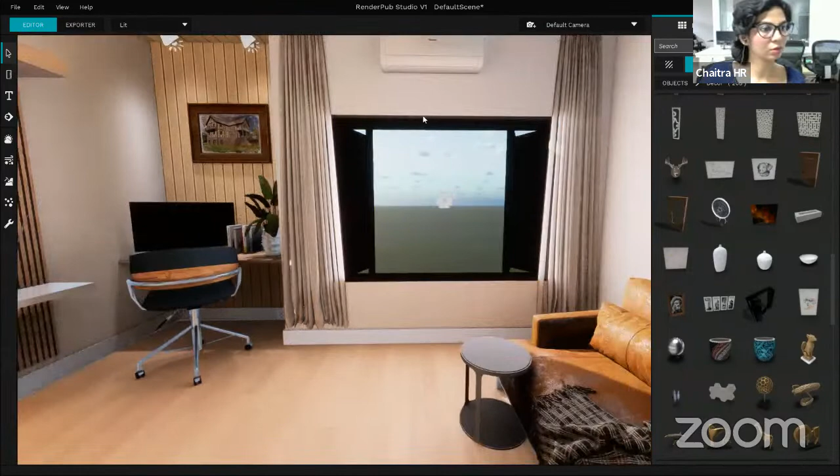Okay, let's go ahead and change the materials. I'm not able to tell much because it's all black. So go to material. I'm just going to keep it white, keep the frame white. So I'm just going to do reset all. What else is there?

Oh, this is probably glass. I'm going to click here, change it to glass. Oh, that's nice. Oh no, I think I clicked this one, keep it black. Reset all. So click on the glass element here. This I'll switch over to glass. Okay.

But we need to change some opacity and other things. I don't like the way it looks right now. So let's go to opacity, reduce, reduce, reduce. Always keep a reference image so you know the shine and everything, because when you're looking at so many elements, it becomes very difficult to gauge what it's supposed to look like. So if you have a reference image here, you can just match it. Reduce the roughness also, maybe, to make it a little bit shinier, not that much.

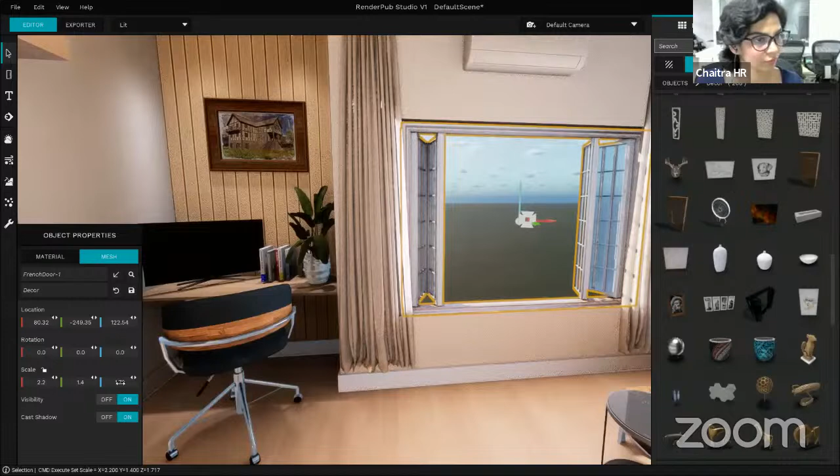Okay, that's looking good. Let's pull in a door here. I'm going to pull in a door with glass so we can let in more light. I think we might have to scale it a little bit. Not too much though, I think just fill out that gap.

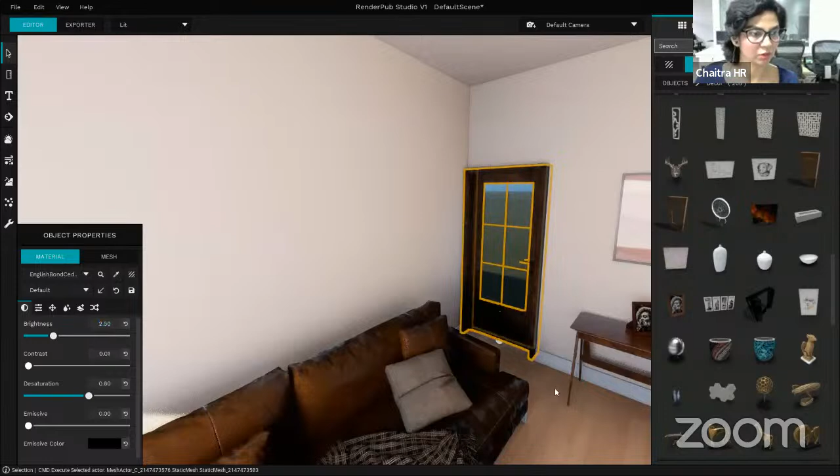And increase the brightness, that should help us with the darkness. That looks like, I think, too bright. I'll try 5.5. Okay, yeah, I think that looks good.

So since there's glass here, I am going to pull in an area light.

So again, since this is a light, I'm not going to scale it in the object category. I'm going to go and change my source width and source height. So just a little bit more, right? Yeah, I think that fills it out. And source height, I'm going to try 150. No, too big. Okay, 140 is what I was going for. Oh, perfect. Okay, it extends a little bit, but that's all right.

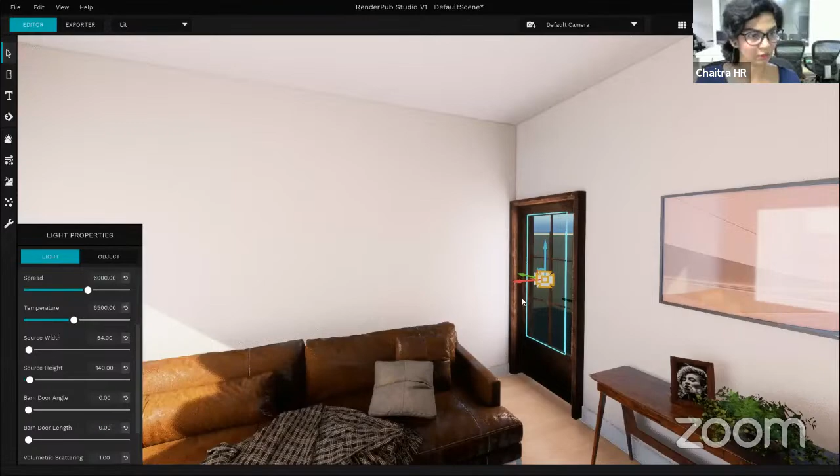Ooh, almost everything is done. Let's pull in a TV, there's no TV here. A wall-mounted TV is what we're looking for, right? Because, okay, this works. Oh, that's really too small. Let me try scaling it up.

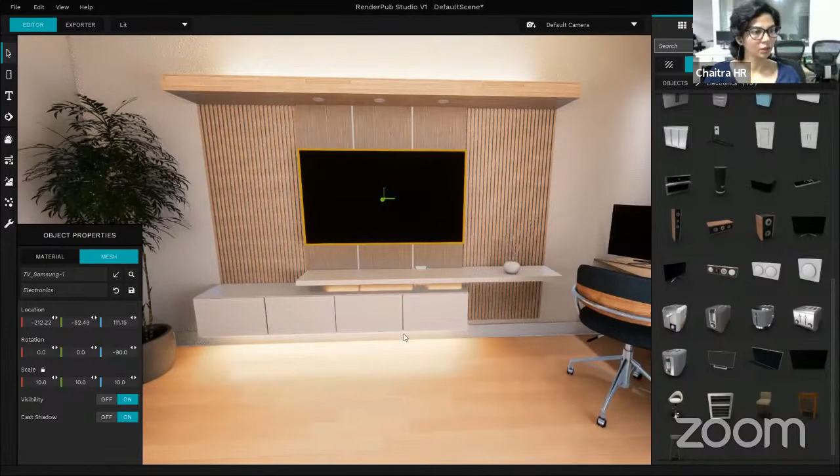Excuse me. I think that looks all right. You could go ahead and get finer controls over the TV and all that, but I'm not going to do that.

So we could place a few objects here. I'm just going to see, maybe I'll place a lamp or something. You could place really anything else. Yeah. Oh. Yeah, I'm just going to leave it there.

This wall still looks plain, so what I'm going to do is, okay. Yeah.

So let's just look around the room, right? So it looks rather realistic and we're almost done. I'm just going to pull in wall panels here, I think. They're in decor, just to pretty it up a little bit. You can choose to not do it, that's just the aesthetic I'm going for.

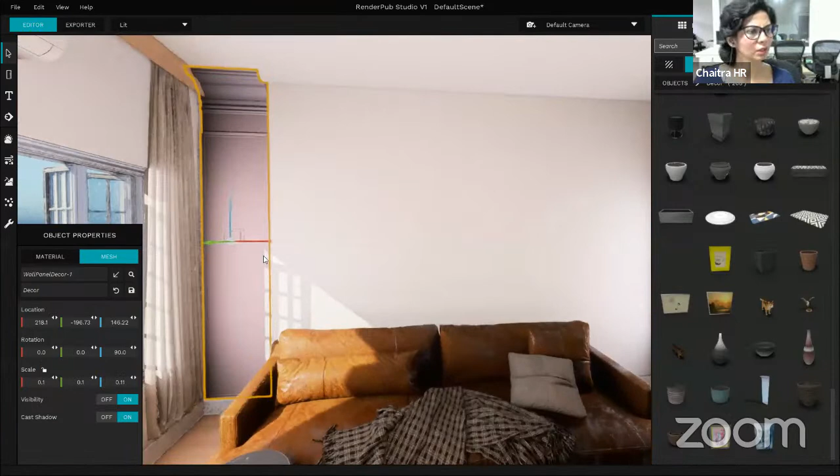I think that looks good. Okay, it has a pinkish tint, so maybe we'll reset albedo. Never mind, first let's just...

Okay, so these have different materials. Okay, yeah, this looks good. I didn't like that pink tint. Nothing happened there, we had to reduce the specularity.

I'm going to go back and change the scaling. Sorry.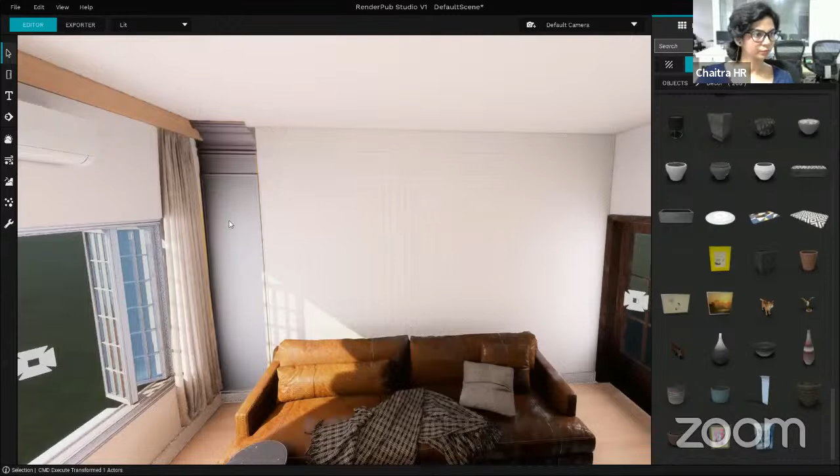Okay, I don't think I can evenly space it out. So I'm just going to copy all of these things. No wait, I can copy all of these things. Hold shift, click all three, then click all.

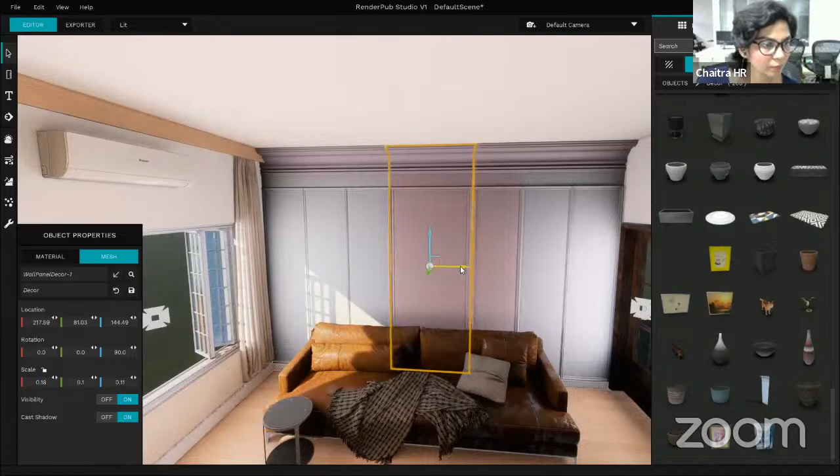Maybe 0.18. Okay, still has that. I'm just going to reset albedo so it looks white. Yeah, there we go. See, this one looks much better.

Change it. Oh, that did the trick. I could have done this before duplicating, so I only had to do it once, but now that I've arranged it all, I'm just committed to my mistake. Yes, okay. Well, it's shaping up.

Maybe I'll pull in a lamp or something, make it look a little more. Objects, lamps. Yeah, I like this one. It's turned around.

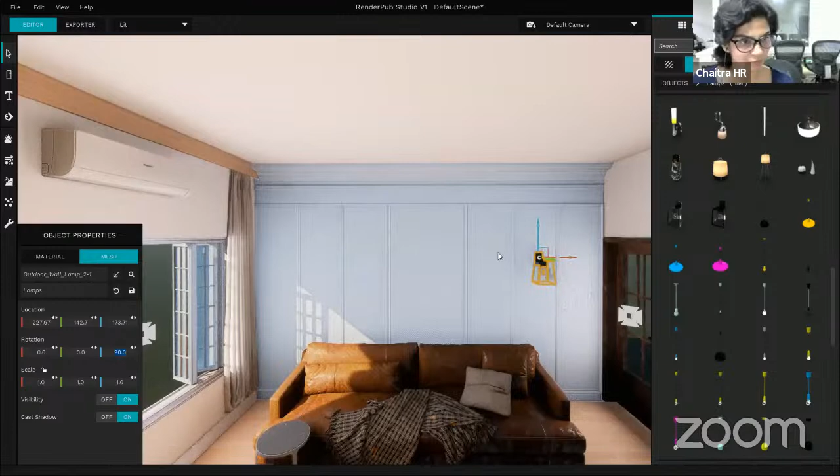The lintel level, right? I think that looks good. So I'm clicking Alt. I don't think I'm clicking on the right gizmo. Let me see. Why is this happening? Never mind. I'm going to pull my sofa to the center a little bit.

Okay, I wanted to see the exporter. Are we showing exporter today? Yeah, we're showing the exporter. So this is just like a basic demo. Over the next 3 days you're going to see a lot more features, but I'll show you a simple exporter.

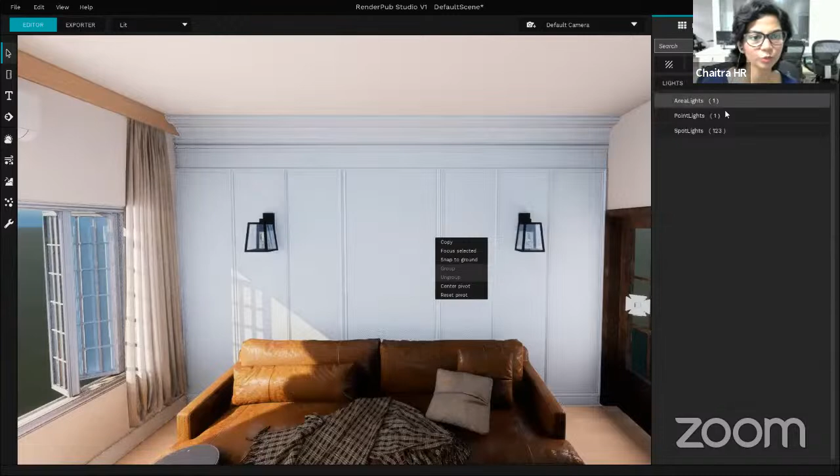So let's put a point light in these. Oh wow, that's too much glare. I'm going to go to render settings, post-process, reduce the bloom intensity. Okay, there, so much more workable. Maybe I will reduce the intensity also because this is still too much light for me to work with.

Okay, one is good. Let's go underneath so we can place it properly. Okay, I need to go underneath, otherwise I can't. It is still too much, so I'm going to play with the source radius and all that.

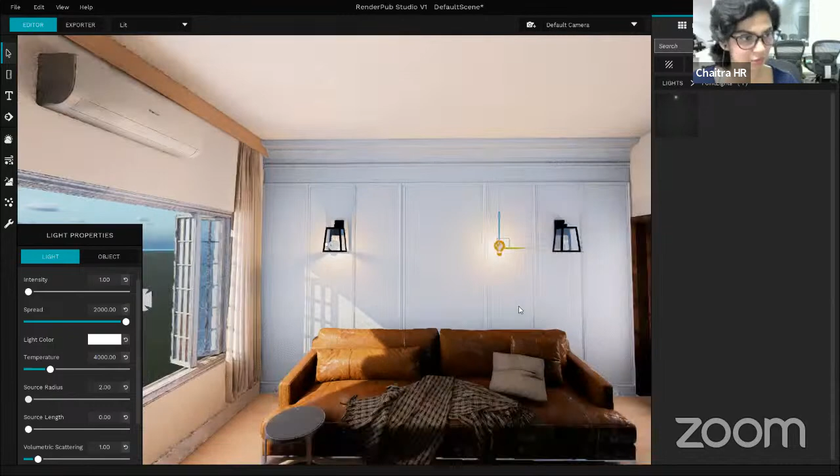Just going to copy and paste it over here.

Let's pull in a clock or something. So I'll show you how to import.

Yeah, so I think this is, yeah. I think it's very small and that's why I can't see it. So I'm going to... still can't see it still. Ah, there we go, able to see it. I think about right.

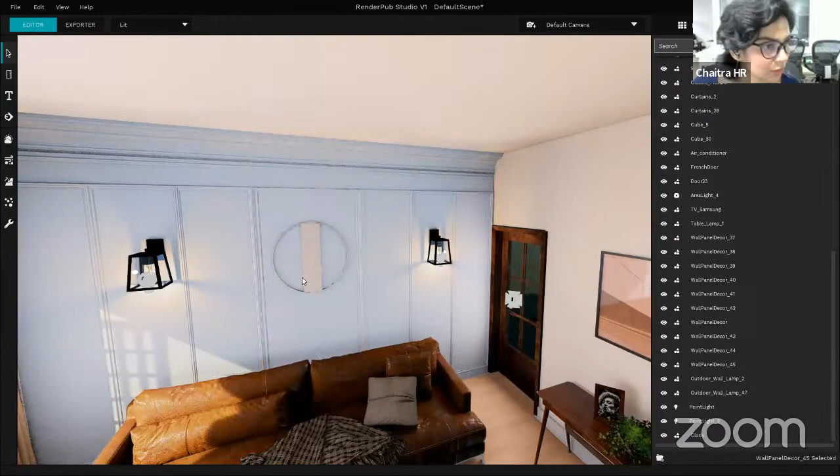Oh, these don't have material, so I'm just going to make it a little goldish. I'm going to click here, click on material from bake. Oh, that's not selected, I would have changed it for something else altogether. So default, and since I want to make it golden, I'm going to crank up the metallicness.

Okay, but it is white metallic now, right? So you need to give it a gold color. Let's go to albedo color, maybe too much red, fiery gold. Yeah, I think I'm happy with the color. So let's reduce the roughness.

Pull in some sort of marble maybe. Ooh, that is too much, so let us scale it, no matter. Going to leave it at that. Okay, I think we're looking good here.

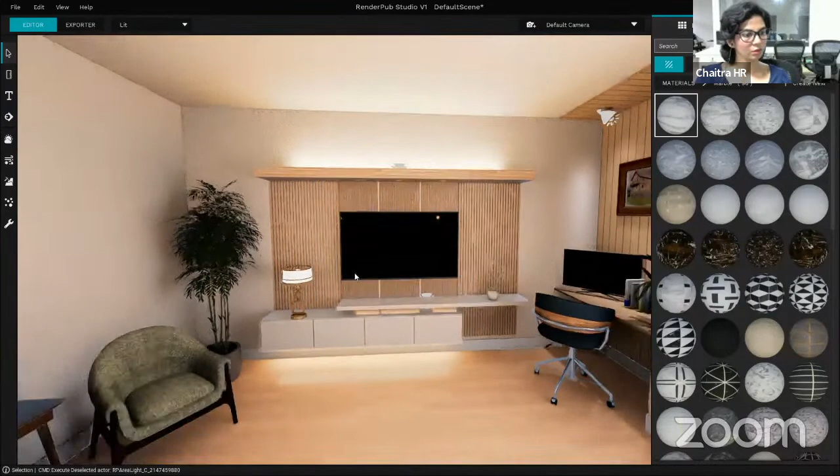We can start showing exporter. We started it very late, so okay.

Yeah. So let me just save it. I don't think I've saved it yet. I'll say NASA, I'll dedicate it to you guys, NASA workshop. Okay, so the star needs to go.

We can switch off the light helpers now.

Maybe I'll just place a carpet and then we're done. You can place a table, a carpet, but I think you guys get the idea. So I'm not going to do too much of it. This isn't really an interior design course, but...

I think 0.1 or something, right? 0.01, that's good enough. And I press G, so it needs to snap to the ground. Good.

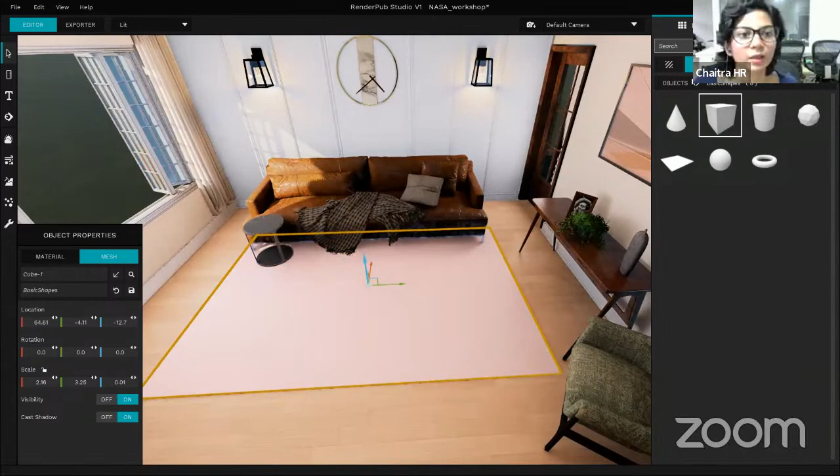And I'll give it a fabric material. I'll just keep it very simple. Maybe not that. Yeah, I'm okay with that. It's a little too brown, so I'll desaturate it.

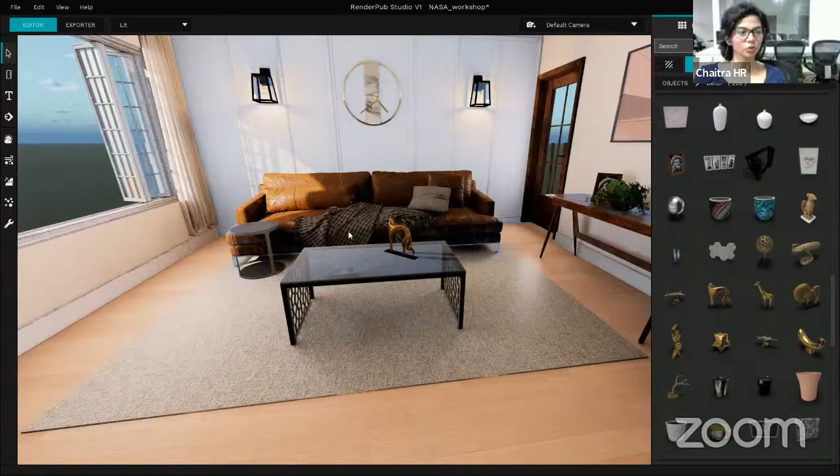That's the thing about rendering, it's about giving different sorts of texture. So if you have a cloth texture here which looks really matte, complement it with a shiny texture, and that adds to photorealism. When there's glass there, if you leave empty planes with no shadows on them, they start to look really plain and fake. So you just add a little object to create some shadows and play with textures. Here it's a reflective material, and I've placed something really rough next to it, so when you place complementing stuff like that, it starts to look very realistic.

You can place more pillows, but I'm not going to do it now.

So we can start with the exporter. I'm going to hit save again. You see the little star here, it's saving. Okay, we are done, we can move on to exporter.

I'm just going to... continue the exporter tomorrow, huh? We can continue the session of the exporter. Rohan says we can continue with the exporter session tomorrow also.

But I just want to do a quick WebVR exporter so you guys can see it on the link. I'm just going to pull in Prithvi to do the exporter. Say hello to Prithvi, he's a master designer. Hello guys. So I'll just quickly show you the exporter.

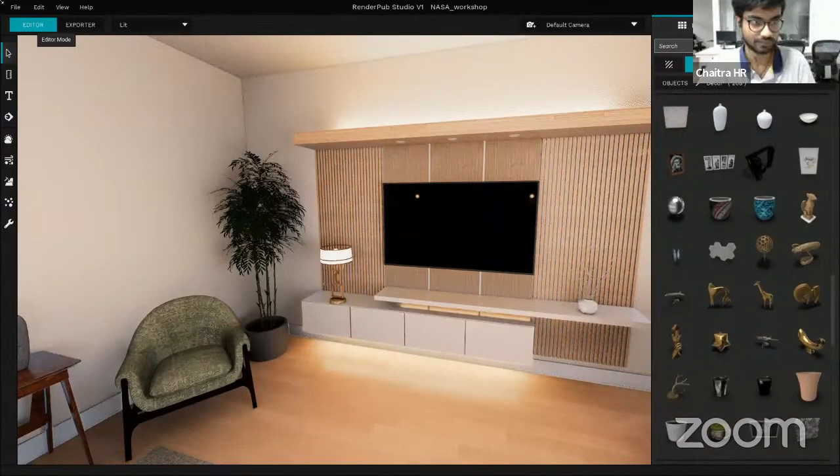So before exporting, what I like to do is quickly change the DLSS settings back to ultra quality, and then I'll get back to exporter.

I have selected photo here, I'll add a photo, and you can see we have a bunch of settings here. So basically I'll come to camera first and correct my tilt correction for my camera, and I'm going to save it. So whatever changes I make in these settings, I have to capture it and save it in my photo.

And then you can add a bunch of LUTs, which is lookup tables, and you can also set its intensity. Maybe I'll just change it to 4, and as I said, I need to capture it for my thing to update.

Let's just show WebVR exporter. All right, just quickly, I'm going to change my ambient occlusion so I have more light occluded by my objects here. You can show them both.

So for photo, I'm going to hit export, and select my file path where I want to export my photo. I'm just going to upload it here again. And I can select how much samples I want. Increasing samples will take much more render time, but it will clear out all the noise from your image. So basically 32 samples is much more than enough for this scene.

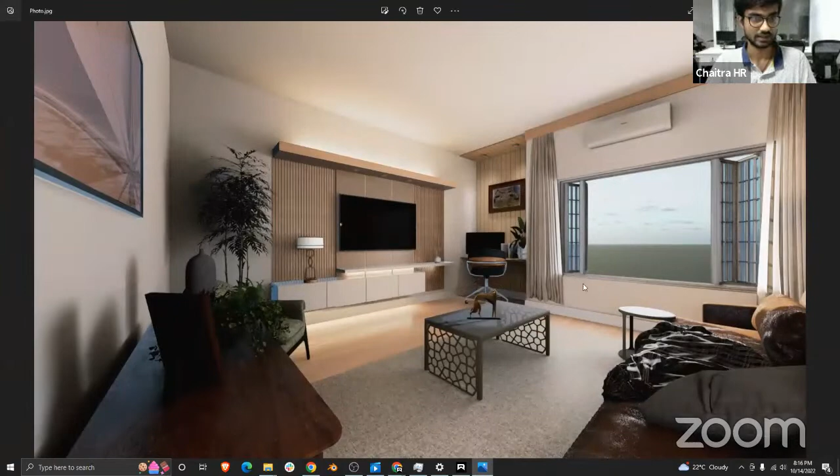What I'm going to do next is quickly add in a WebVR walkthrough, just a bunch of hotspots here to show how our WebVR looks.

I'm going to hit export. It's the same feature. As you can see, I've already signed into Spaces, and this is my project name, how it's going to be there on RenderPub Spaces. For this I'm just going to give 16 samples because I wanted to render this out pretty quickly, and I'll just hit export and let the RenderPub Studio package take care of the rest of the stuff.

Yeah, we'll do this, yes, you can take it from there. So I'll just hand it over to our CEO. No one's ever called me that until now, by the way.

Let me just pull in Rohan, and you guys can start shooting your questions. System minimum requirements, okay, I think that we've uploaded on that. No Rohan, can you come here so we can just answer the questions while we wait for it to export?